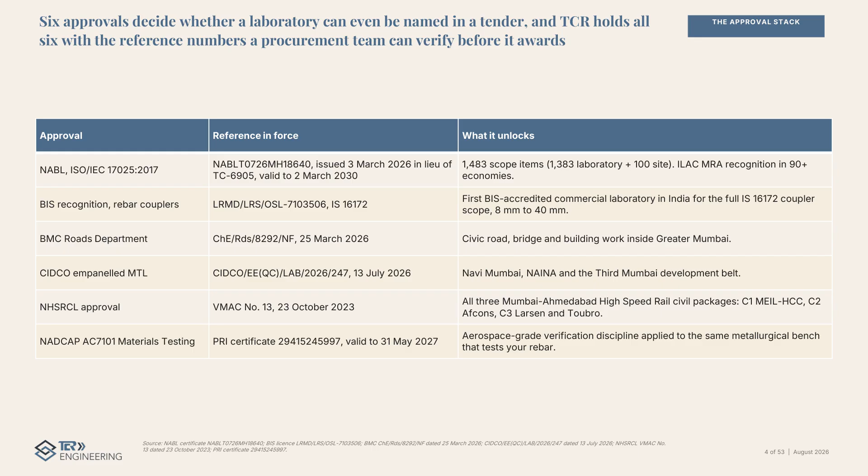Accreditation is not a logo on a letterhead. It is a traceable measurement chain with a stated uncertainty, and that is precisely what survives an arbitration, an audit, or a municipal challenge. Four things sit behind every accredited number.

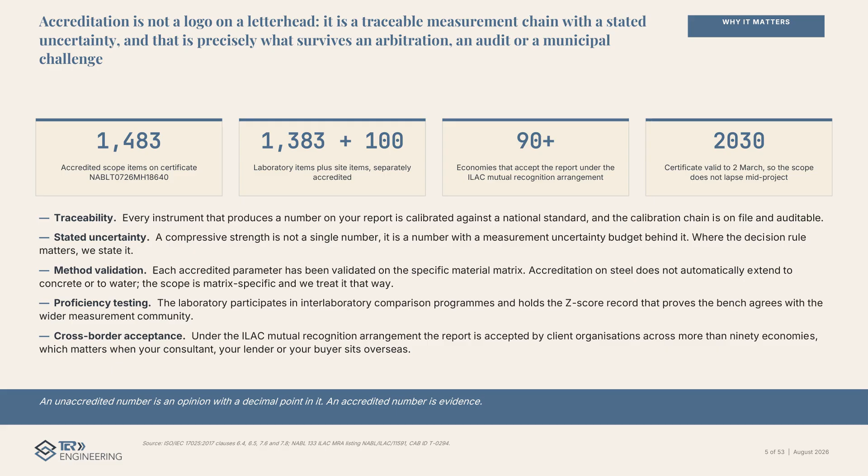The instrument is calibrated against a national standard and the chain is on file. The result carries a measurement uncertainty budget. The method has been validated on your specific material, because accreditation on steel does not automatically extend to concrete or to water, and the laboratory proves itself in interlaboratory comparisons. Strip any of those away, and what remains is an opinion with a decimal point in it.

This is the slide most laboratories will not show you. We publish the boundary of our own accreditation. On the left is what carries the NABL mark today: cement, binders, admixtures, aggregates, concrete including the durability suite, blocks, bricks, paver blocks, ceramic tiles, stone, rebar couplers, soil chemistry, and the site non-destructive tests on reinforced concrete. On the right...

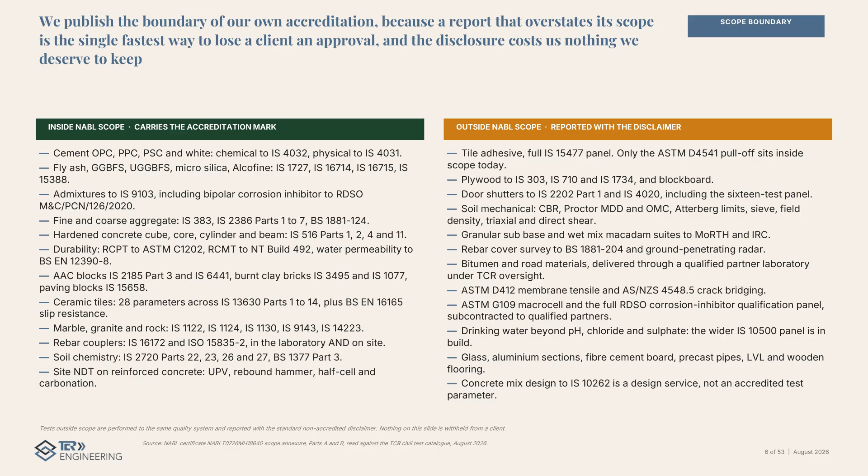...is what we perform to the same quality system but report with the standard non-accredited disclaimer: tile adhesive beyond the pull-off, plywood, door shutters, soil mechanical testing, cover survey, bitumen. We publish this because a report that overstates its scope is the fastest way to lose a client an approval.

Testing fails on logistics far more often than it fails on chemistry. So the operational answers come first: what to send, how much of it, how fast it comes back, and who collects it.

3 concrete cubes give you a strength result the next working day. 30 kilograms of soil covers a CBR. 24 blocks covers a full AAC analysis. 1 liter of water covers the construction water panel under IS 456.

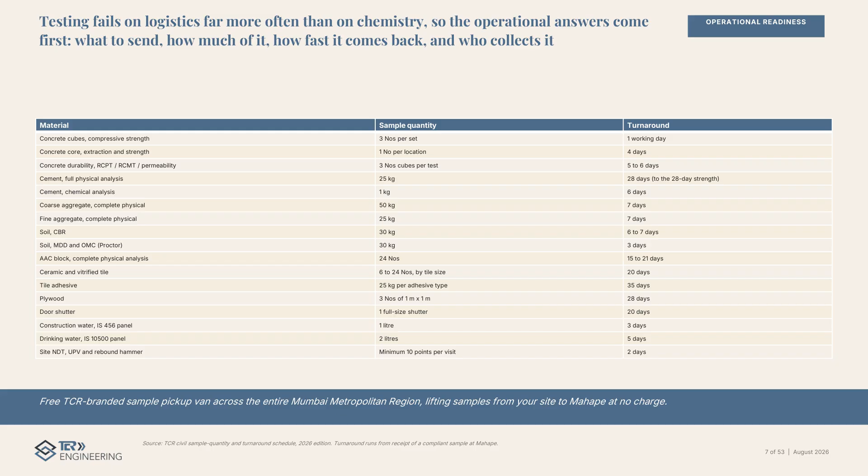And the piece that removes the argument entirely: TCR runs a free TCR branded sample pickup van across the entire Mumbai metropolitan region, lifting samples from your site to our Mahape laboratory at no charge.

Long-term rate contracts are not won on price. They are won by a laboratory that holds the client's program dates as if they were its own. So we derive the test calendar from the construction calendar. Cube ages, coupler lot releases, and pour temperatures are booked against your bar chart before the month starts.

Our site teams attend the pour, the pile, and the lot release rather than waiting for a sample to arrive. And where a method sits outside our accredited scope, we still carry the consolidated report and one signature. That is why Godrej, Kalpataru, Shapoorji Pallonji, and Rustomji renew rather than requote.

Segment 1, real estate developers. The defining feature of this segment is that a tower is judged twice. It is judged at handover on the finish, on whether the tiles are flat, the shutters are square, and the adhesive holds. And it is judged 20 years later on the concrete, on whether the cover was right and the chloride stayed out.

Most laboratories serve one of those two moments. TCR tests new construction materials and building finishing works on the same bench, under the same accreditation, with one report and one point of accountability.

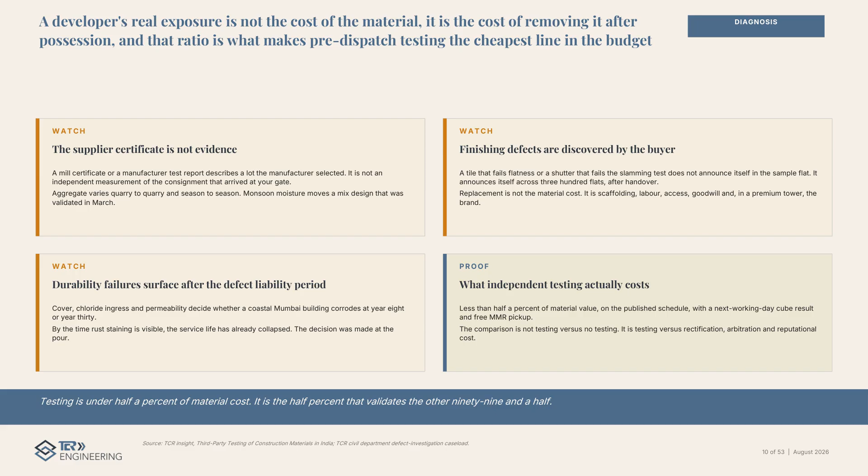Second, finishing defects are discovered by the buyer across 300 flats after handover. Third, durability failures surface after the defect liability period, when the decision that caused them was actually made at the pour. Independent testing costs under 0.5% of material value. It is the 0.5% that validates the other 99.5%.

Every cementitious binder that goes into the mix is tested chemically and physically before it is approved for the pour. And every parameter on this list sits inside the accredited scope. Cement runs a full chemical panel under IS 4032 and a full physical panel under IS 4031 out to the 28-day strength. Slag, microsilica, fly ash and Alcofine each carry their own chemistry and their own activity or reactivity index.

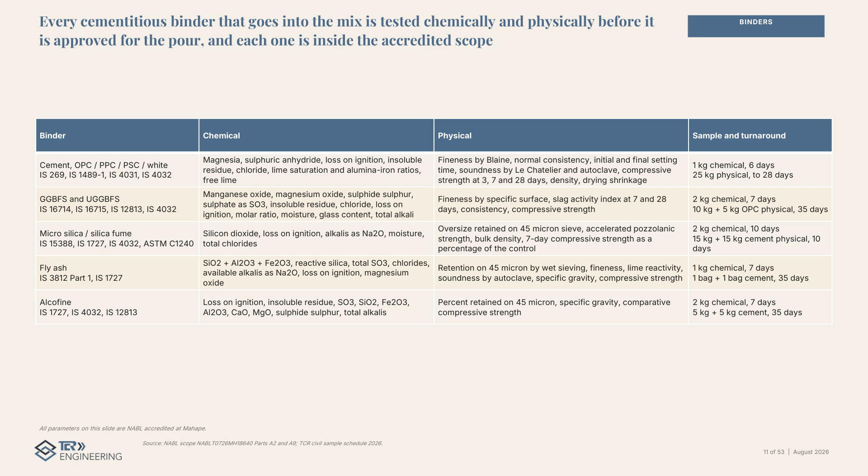The point is not the individual test. It is that a mix design is only as good as the weakest binder in it. And you cannot know which one that is without measuring all of them.

Admixture and water are the two mix inputs most often accepted on trust. And they are the two that most reliably explain a strength result nobody can otherwise account for. On the admixture side, one liter and five days gives you the chemical panel under IS 9103: dry material content, relative density, chloride ion content, pH and ash.

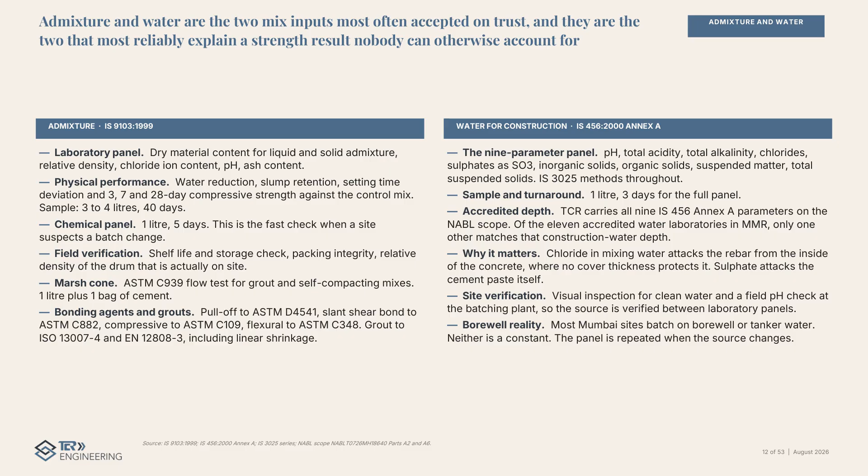On the water side, one liter and three days gives you the full nine parameter panel that IS 456 Annex A actually requires. TCR carries all nine on the accredited scope. Chloride in mixing water attacks the rebar from inside the concrete, where no cover thickness protects it.

Aggregate is 60 to 75% of the concrete by volume, and the most variable input on the site, which is why the aggregate panel is the one we ask developers to run most often. On the physical side: grading, specific gravity, water absorption, bulk density, impact, crushing, 10% fines, Los Angeles abrasion, flakiness and elongation. On the chemical side: soundness in sodium and magnesium sulfate, alkali aggregate reactivity, chloride, sulfate, and organic impurities.

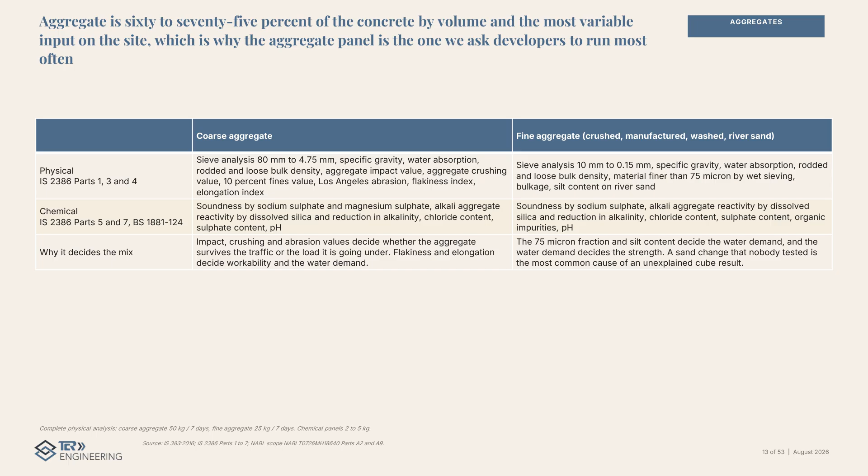The one that catches most sites is the 75 micron fraction in the sand. It drives the water demand, and the water demand drives the strength. A sand change nobody tested is the most common cause of an unexplained cube result.

Reinforcement is where a saving on paper becomes a liability in concrete. Mechanically, we run tensile strength, 0.2% proof stress, elongation, reduction in area, and the bend and rebend test, which is the check that finds embrittlement a tensile test alone will pass.

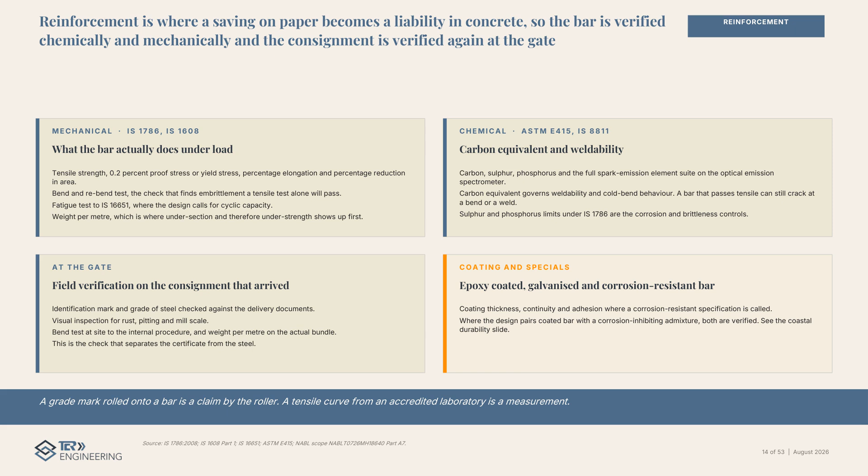Chemically, we run carbon, sulfur, phosphorus, and the full element suite on the spark emission spectrometer, because carbon equivalent governs weldability and cold bend behavior. And at the gate, we verify the identification mark, the visual condition, and the weight per meter of the bundle that actually arrived. That last one is what separates the certificate from the steel.

Concrete is tested three times over, and all three have to reconcile. Before the pour, we design or revalidate the mix under IS 10262, and revalidation matters most when a binder, a sand, or an admixture source changes.

During the pour, we measure workability, plastic density, and, critically, concrete temperature to ASTM-C 1064, which sits on our accredited site scope. After the pour, we measure compressive strength on cubes, on extracted cores, flexural strength on beams, density, and where there is a dispute, cement content, and chloride content on the hardened concrete itself.

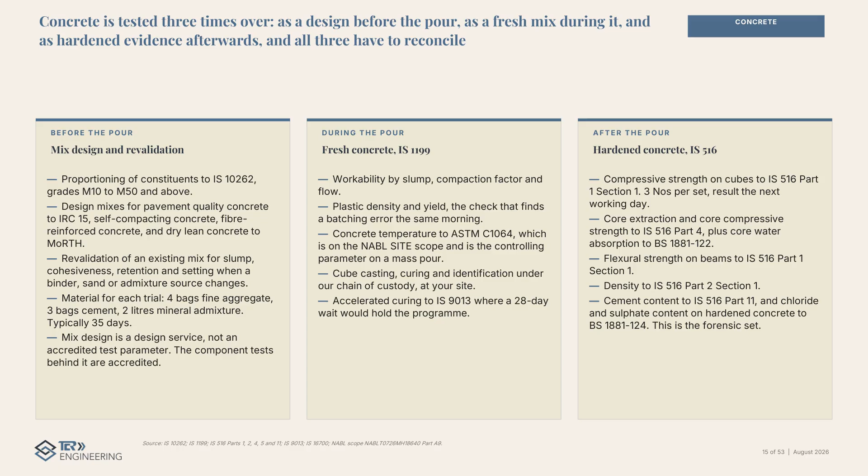That last set is the forensic one. Strength tells you whether the building stands up today.

Durability tells you how long it keeps standing. And in coastal Mumbai, that is the more expensive question to get wrong.

The rapid chloride penetration test under ASTM C 1202 is the most specified durability test in this city, and it is on our accredited scope. So is the rapid chloride migration test under NT-Build 492, which gives you a coefficient you can put into a service life model rather than a comparative index. So is water permeability, which is usually the acceptance criterion on a raft or a water tank.

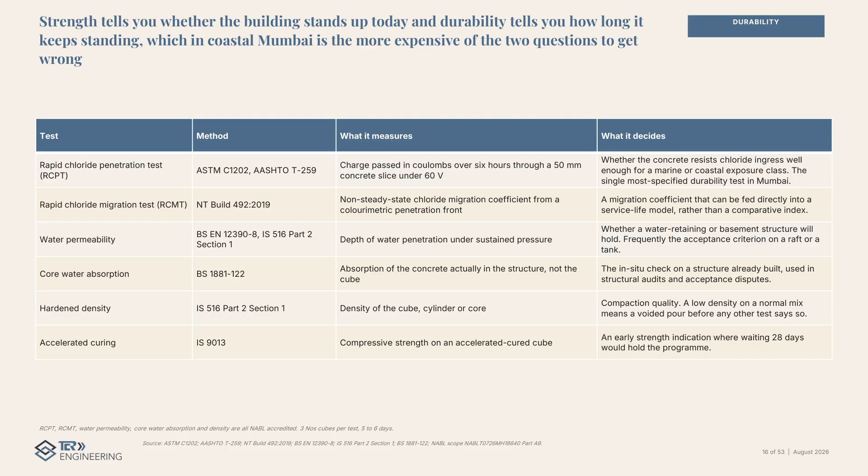3 cubes per test, 5 to 6 days.

Tile testing is the fastest growing line on our civil bench. And the reason is simple. A tile is the one material a flat buyer inspects personally, from standing height on handover day.

TCR carries 28 accredited ceramic tile parameters under IS 13630. 9 of them are geometry: length, width, thickness, rectangularity, straightness, and 4 separate flatness measurements. The rest covers strength, abrasion, water absorption, thermal shock, crazing, frost, and the coefficient of friction, wet and dry, which is the slip test that reaches a court.

Sample: 6 to 24 tiles, depending on size, 20 days.

A tile that passes every test still fails if the adhesive lets go. And adhesive is where Indian sites most often substitute a grade without telling anybody.

The full panel under IS 15477 covers tensile and shear adhesion, dry, wet, and after heat aging, plus open time, adjustment time, slip, and deformability.

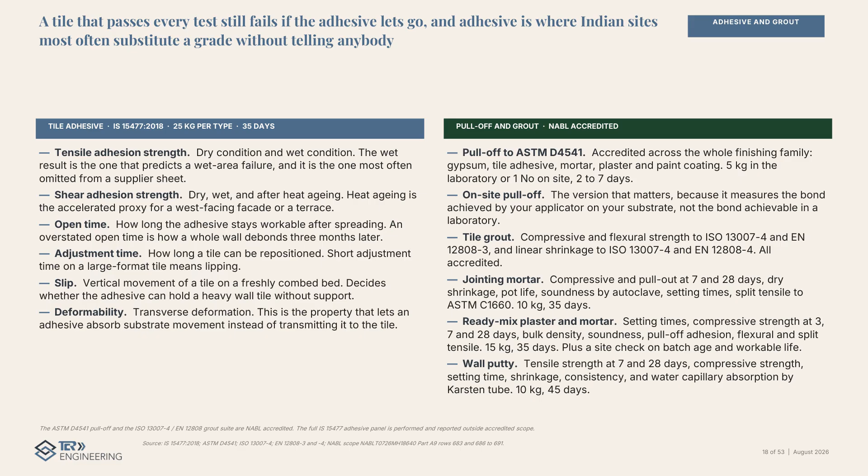What is accredited is the pull-off test under ASTM D 4541, including on-site, and the full grout suite. The on-site pull-off is the one that matters because it measures the bond your applicator achieved.

Blocks and bricks are bought by the truckload on price and installed before anybody measures them. So the whole masonry package is verified on arrival rather than after the plaster cracks.

AAC blocks are accredited. 24 blocks gives you dimensions, compressive strength, density, drying shrinkage, moisture content, and thermal conductivity in 15 to 21 days. Burnt clay bricks and paving blocks are also accredited.

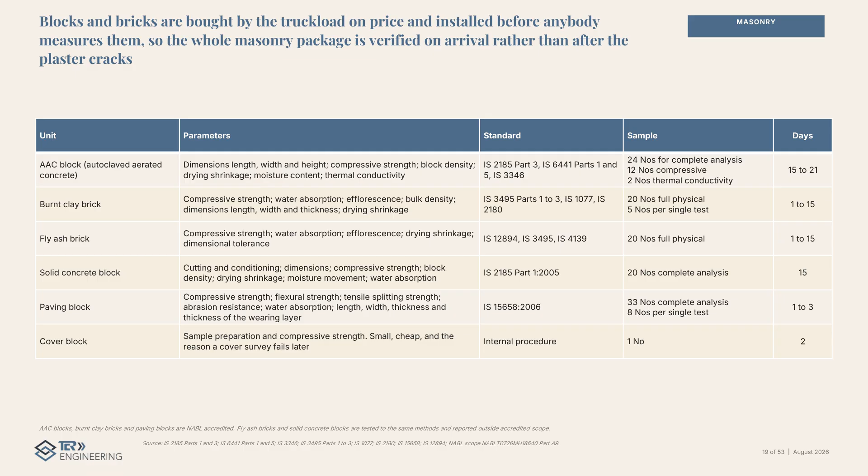Note the cover block at the bottom of that list. It is the cheapest item on the page. 1 block and 2 days. And it is the reason a rebar cover survey fails 6 months later.

Plywood and door shutters are the two finishing items that fail loudest after possession. And both are now high volume lines on the TCR bench.

Plywood: 3 panels of 1 meter by 1 meter, 28 days, covering dimensions, moisture, density, glue shear strength dry, and after 72 hours in water, tensile, static bending, and nail and screw holding power. That water resistance set is the BWP versus MR distinction, measured rather than claimed.

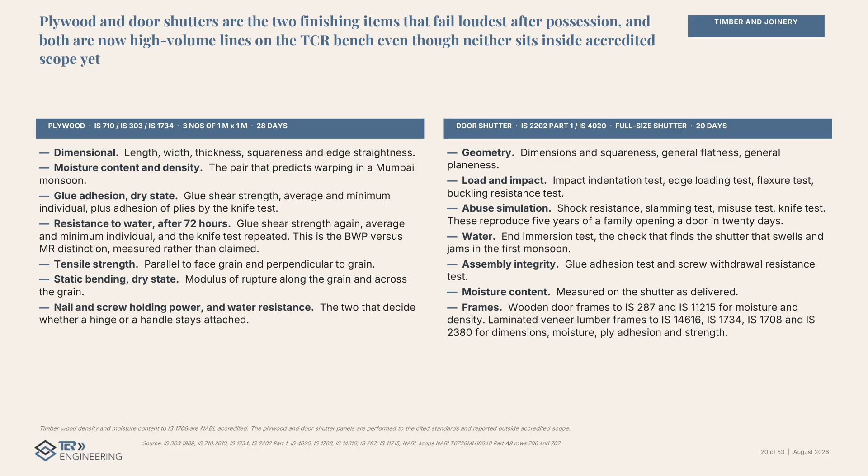Door shutters: 1 full-size shutter, 20 days, 16 tests, including slamming, misuse, end immersion, and screw withdrawal. Both sit outside our accredited scope today, and we mark them accordingly.

Stone, boards, and plaster complete the finishing package. The stone family is fully accredited, which matters because a marble floor is both the most visible and the most disputed surface in a tower.

7 pieces of 300 by 300 millimeter marble, 8 days, gives you water absorption, specific gravity, hardness, and dimensions. Granite and rock the same. Gypsum plaster, building lime and timber are also accredited.

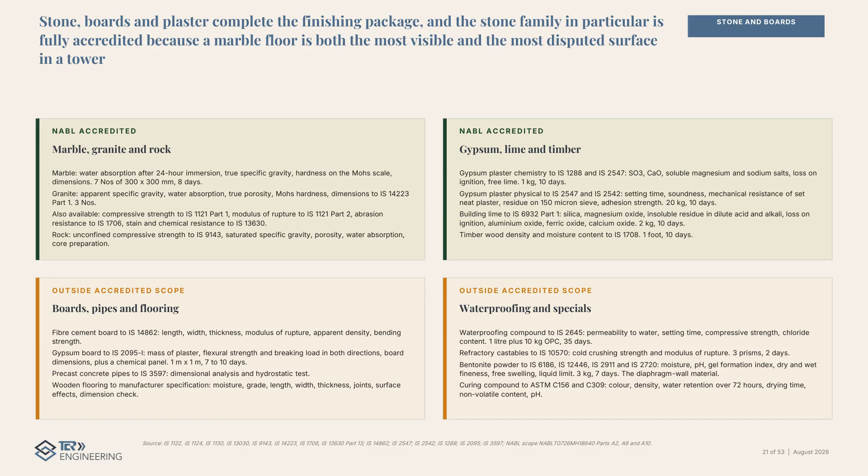Fiber cement board, gypsum board, precast pipes, wooden flooring, waterproofing compound, refractory castables, and bentonite are tested to the cited standards and reported outside accredited scope.

The facade package is where a developer's specification is quietly value engineered. So aluminium sections and glass are verified for alloy, coating, and safety performance rather than for appearance.

On aluminium, we run the full chemical composition by optical emission spectrometry, which is the check that finds a 6063 section sold as 6061. Then tensile, hardness, weight per meter, powder coating thickness, scratch hardness, and cross-cut adhesion.

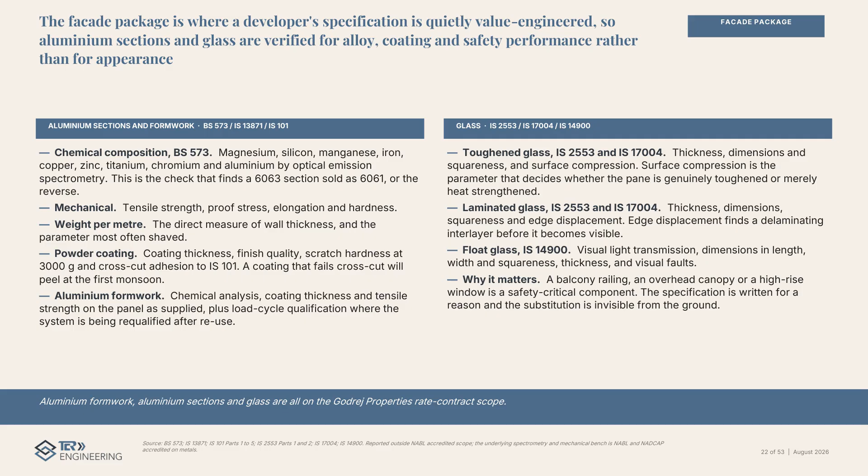On glass, we measure surface compression on toughened panes, which is what separates genuinely toughened glass from heat-strengthened glass, and edge displacement on laminated panes.

A waterproofing membrane is specified on its tensile strength and it fails on its elongation. ASTM D 412 measures both maximum stress before rupture and how far the elastomer stretches first. A membrane at 400% elongation accommodates 5 times its original length.

One at 100% reaches only double.

D 412 pulls a clean strip under ideal conditions, but buildings do not crack under ideal conditions. So we pair it with the crack bridging test under AS-NZS 4548.5, where the membrane is bonded to a cracked substrate and the crack is opened while the membrane is watched.

Coastal Mumbai concrete is a chloride problem. A bipolar corrosion inhibiting admixture acts on both halves of the corrosion cell at once. It forms a protective layer on the steel and slows chloride penetration through the concrete. Older anodic-only inhibitors leave the cathodic half running once chloride arrives.

Chloride breaches the passive film on steel at about 0.4% by mass of cement, and past that point, the rust expands, cracks the cover, and accelerates itself. Indian Railways specifies this category under RDSO specification 126 of 2020.

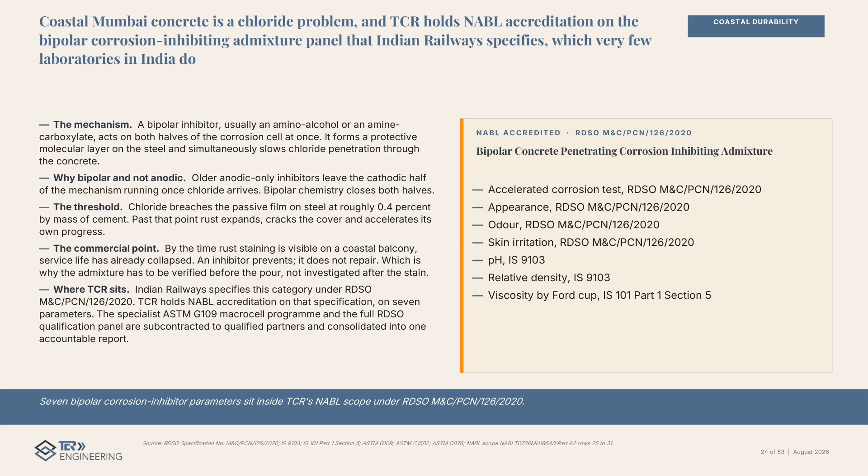TCR holds NABL accreditation on 7 parameters of that specification. 4 of India's largest developers hold long-term rate contracts with TCR rather than issuing job orders. The Godrej Properties contract, awarded April 2026, runs 3 years across the whole Mumbai zone and more than 8 locations. Its scope is a fair description of what a full developer engagement looks like.

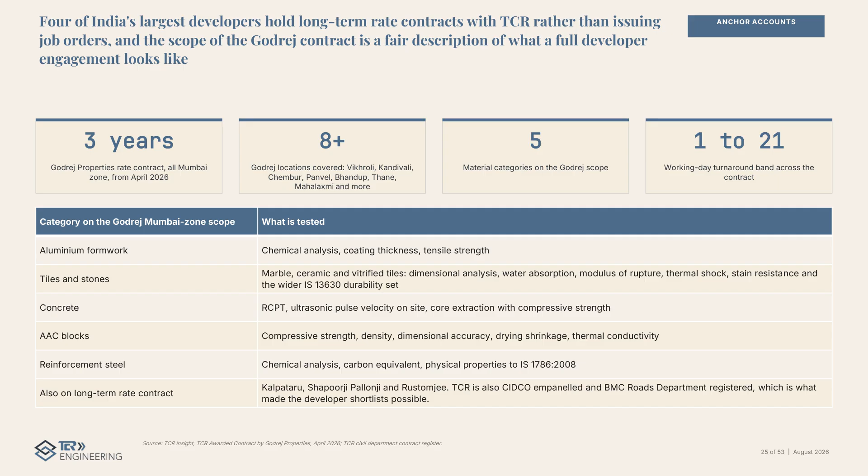Aluminium formwork, tiles and stones, concrete including RCPT and site ultrasonic pulse velocity, AAC blocks, and reinforcement steel with carbon equivalent. Kalpataru, Shapoorji Pallonji, and Rustomjee run on the same basis. What made those shortlists possible was CIDCO empanelment and BMC registration.

This is the page to send to a procurement or quality engineer. 20 materials, what to collect, how much of it, and when the result lands. 3 cubes gives you strength in 1 day. 25 kilograms of cement gives you the full physical panel, though that one runs 28 days because it goes to the 28-day strength.

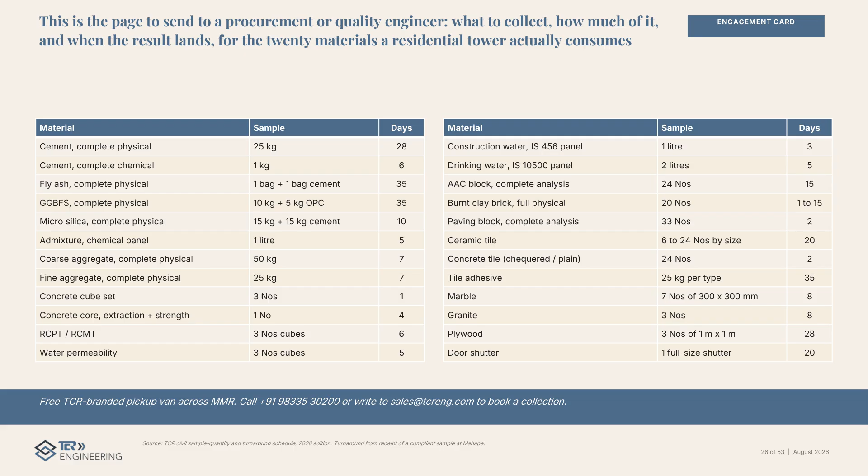24 AAC blocks, 15 days. 6 to 24 tiles, depending on size, 20 days. 25 kilograms of tile adhesive per type, 35 days. 1 liter of construction water, 3 days. And the pickup van collects all of it from your site at no charge, anywhere in the Mumbai metropolitan region.

Segment 2: Infrastructure and EPC contractors. This segment has one structural feature that developers do not. The laboratory has to be on the approved list before the testing package is committed, and often before the contract is even awarded. That is why the approvals matter more here than the price list does.

TCR is the first BIS-accredited commercial laboratory in India for Rebar Couplers, approved on all 3 high-speed rail civil packages, registered with the BMC Roads Department, and empaneled with CIDCO for the 3rd Mumbai belt.

Maharashtra has committed a new project pipeline from 2026 onward that will consume construction materials testing for a decade, and the laboratory decision on each package is being made now.

6 projects sit in the top priority band. 3rd Mumbai and the KSC New Town, 323 square kilometers in the Raigad corridor. NAINA, the Navi Mumbai Airport Influence Ecosystem. The Thane Ring Metro, 29 kilometers and 22 stations. Mumbai Metro Line 5A and the Vadhavan Port to Samruddhi Freight Corridor.

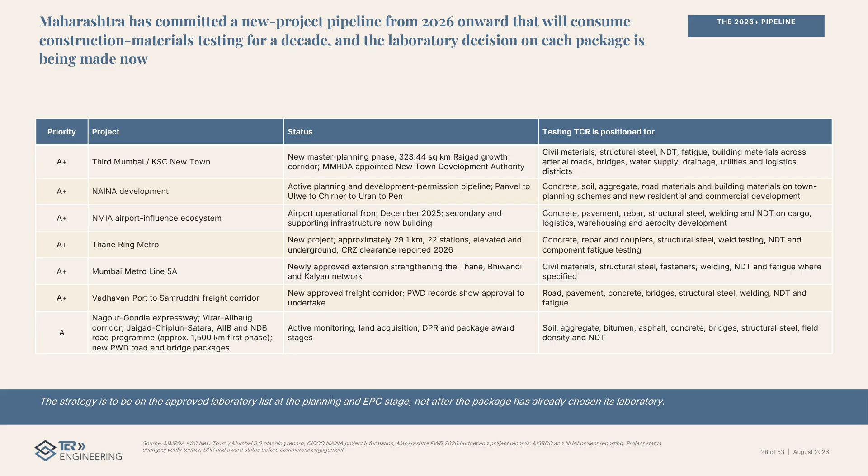TCR's strategy is to be on the approved laboratory list at the planning and EPC stage, not afterwards. This is the capability I would ask you to remember.

TCR is the first and only commercial laboratory in India accredited by BIS for the full IS 16172 Rebar Coupler scope, 8mm to 40, and on a viaduct program that is not a credential, it is a critical-path dependency. Here is why: in congested reinforcement, a lap splice needs length, cover, and space a metro pier cap does not have, so a mechanical splice replaces it. Once the coupler carries the load path, the coupler is the reinforcement.

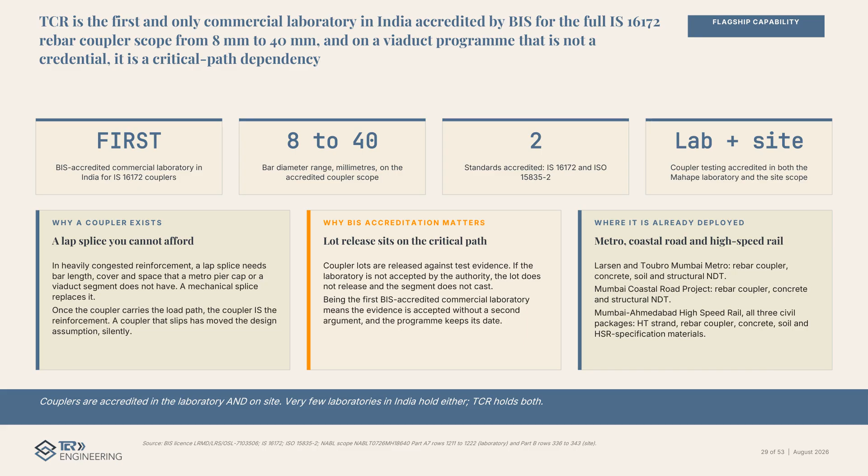Lots are released against test evidence. If the laboratory is not accepted, the lot does not release, and the segment does not cast. The coupler qualification set is 5 mechanical tests plus the chemistry, and each one exists because a different real failure mode was found in service.

The static tensile test proves the splice is stronger than the bar, so failure occurs in the bar. The slip test measures residual movement across the splice, because a coupler that is strong but not stiff turns slip into crack width, and crack width into chloride ingress.

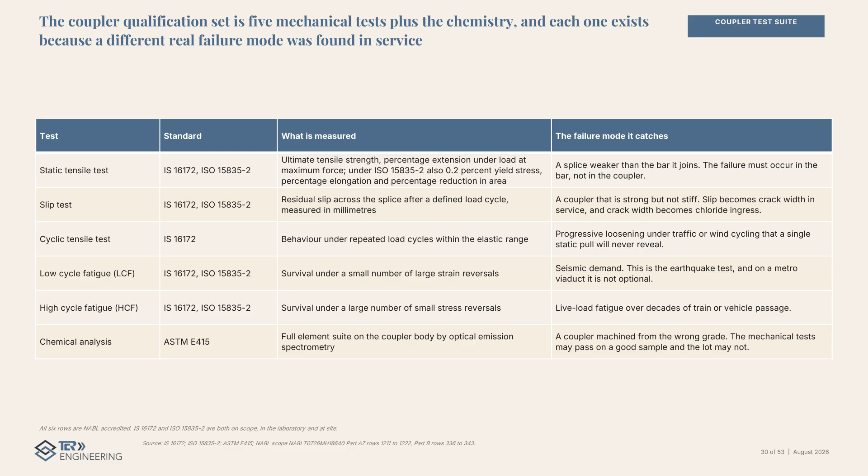The cyclic test finds progressive loosening. Low cycle fatigue is the seismic test. High cycle fatigue is the live load test over decades. And the chemistry catches a coupler machined from the wrong grade, which the mechanical tests on a good sample will not. Pre-stressing steel and reinforcement carry the load in every viaduct and every long span deck.

High tensile strand is tested for breaking load, 0.2% proof load, elongation and relaxation under IS 14268 and ASTM A416. We deliver that on all 3 high-speed rail civil packages. Strand governs camber, pre-stress loss, and therefore the long-term geometry of a segmental viaduct.

On reinforcement, we run the full IS 1786 set plus fatigue and carbon equivalent. And because the metallurgical bench, the concrete bench, and the site NDT bench sit under one management system, an anomaly in one gets chased into the others.

Geotechnical and pavement layer testing is a large part of every highway and township package. The foundation soil suite covers modified Proctor, CBR, Atterberg limits, sieve analysis, specific gravity, unconfined compression, free swell, and field density. Granular sub-base and wet mix macadam carry their own gradation, impact, and design mix sets under MoRTH. 30 kilograms covers a CBR or a Proctor.

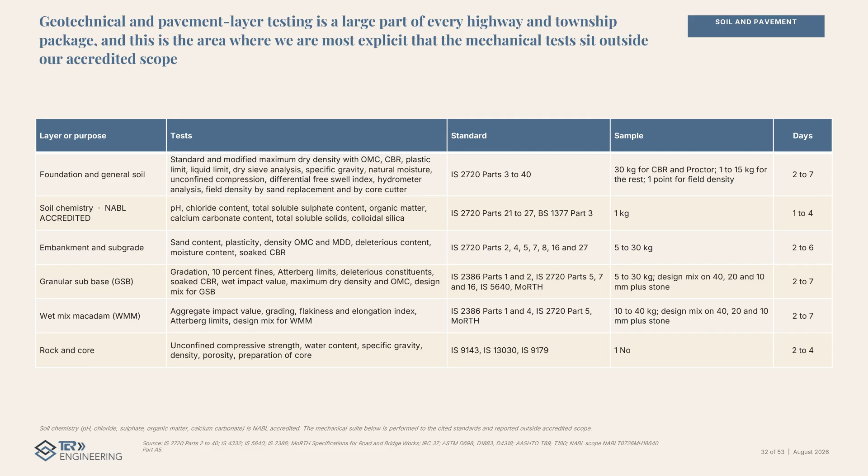Now the honest part: only the soil chemistry sits inside our NABL scope - pH, chloride, sulfate, organic matter, and calcium carbonate. The mechanical suite is performed to the same standards and reported outside accredited scope, and we mark it that way.

Road and pavement work reaches TCR through the BMC Roads Department registration secured in March 2026. Reference CHE/RDS/8292. NABL accreditation was the prerequisite for it. The registration covers chemical, mechanical, and non-destructive testing inside Greater Mumbai.

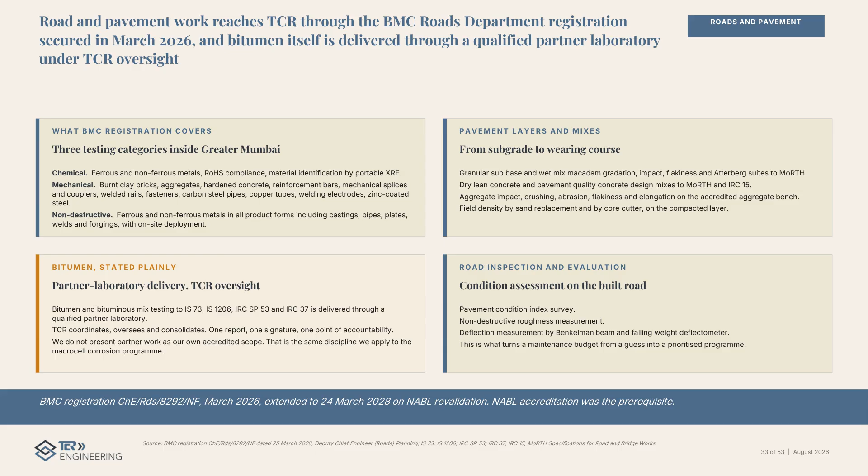On pavement layers, we run granular sub-base, wet mix macadam, dry lean concrete, and pavement quality concrete design. On the built road, we run pavement condition index, roughness, and deflection by Benkelman beam, or falling weight deflectometer. Bitumen itself is delivered through a qualified partner laboratory under our oversight, and we say so rather than presenting it as our own scope.

500 bridges is not a marketing number, it is an operating capability. TCR runs a continuous program with Maharashtra PWD, and from March 2026, a robotic underwater inspection program with the BMC covering more than 400 bridges with AI assistance on the imagery. The reason robotic and underwater access matters is that the majority of unexpected bridge failures originate at the pier, the pile cap, and the scour protection, which is precisely what a walkover survey never sees.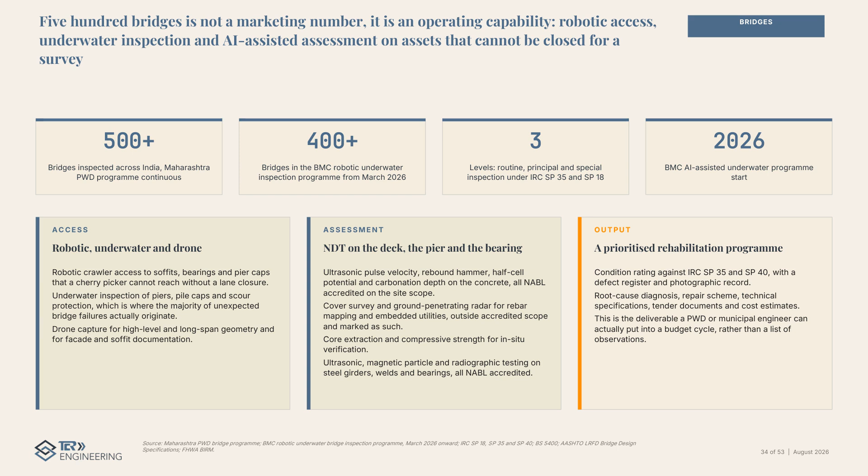The output is not a list of observations. It is a condition rating, a repair scheme, specifications, tender documents, and a cost estimate.

Structural steel, welding, and fatigue sit on the same accredited metallurgical bench that serves aerospace. On mechanical properties, we run tensile, proof stress, elongation, Charpy and Izod impact, including sub-zero, hardness in 3 scales, and component fatigue. On welding, we run bend tests to ASME Section 9, AWS D1.1, and API 1104, plus macro and micro examination of the weld and heat affected zone.

On non-destructive testing, we run ultrasonic, radiographic, magnetic particle, and liquid penetrant, accredited in the laboratory and on-site. That bench also holds NADCAP AC 7101, which is the strictest audit any of it faces.

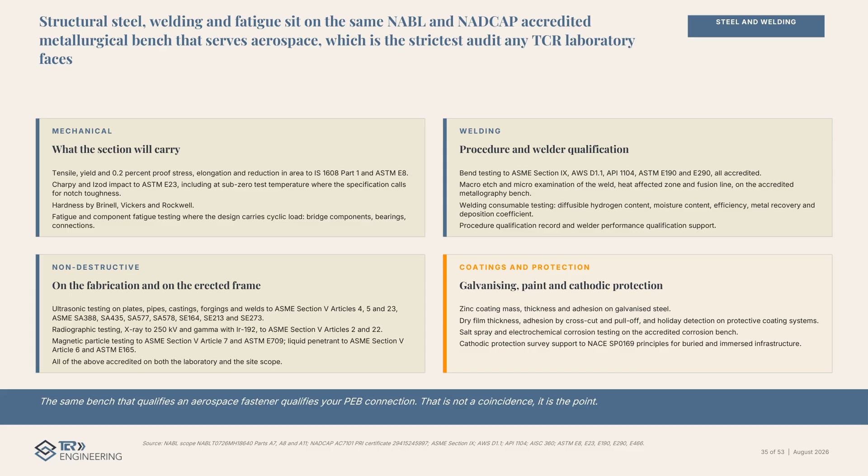Industrial civil infrastructure is a distinct market from buildings and roads. TCR certifies grain silos to 10,000 metric ton capacity against EN 10346 S350GD coated steel sheet. And where the silo carries an explosive dust scope, the assessment runs inside the ATEX and PESO certification framework, because grain dust is an explosion hazard with its own regulatory register.

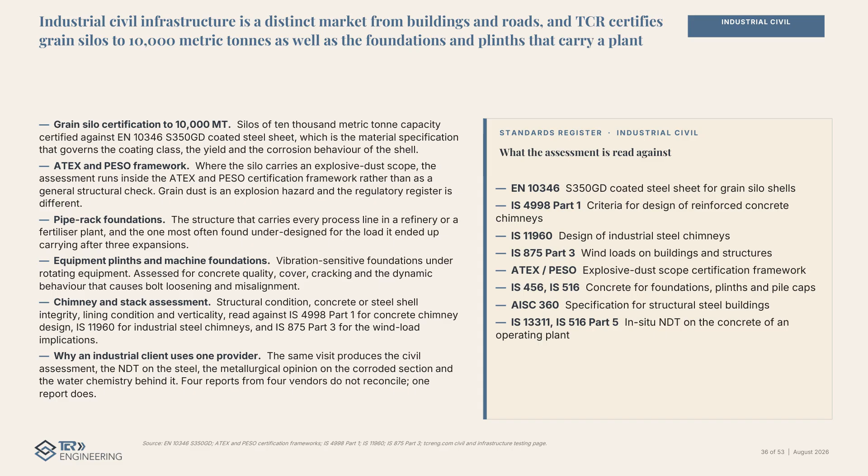The same capability extends to pipe rack foundations, equipment plinths, machine foundations and chimneys, read against IS 4998, IS 11960, and IS 875 Part 3 for wind. A chimney, a stack, or a tall building core that is out of plumb is carrying a wind moment nobody designed for.

Theodolite survey is the measurement that turns a suspicion into a number. We measure deviation from vertical at successive elevations, straightness between them, which distinguishes a uniform lean from a local bulge and twist. Here is why it matters.

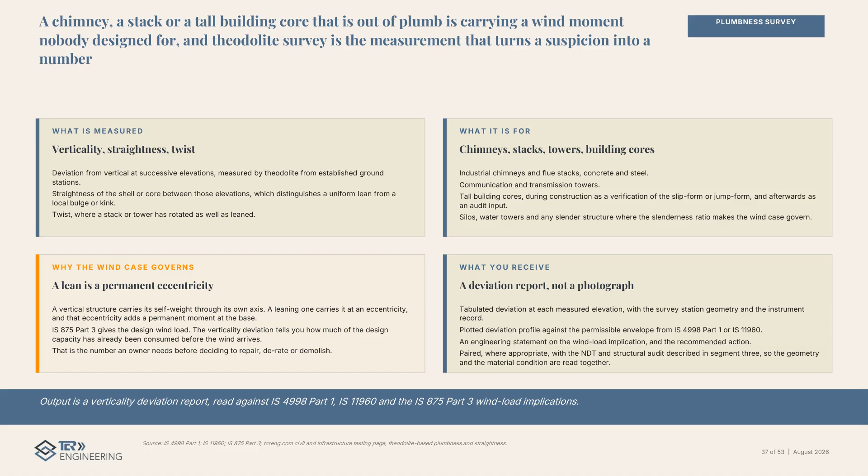A vertical structure carries its self-weight through its own axis. A leaning one carries it at an eccentricity, and that adds a permanent base moment. The deviation report tells the owner how much design capacity has already been consumed before the wind arrives.

The infrastructure track record is the part of this brief a procurement team can verify independently, which is why it carries more weight than any capability claim. TCR is approved on the Mumbai-Ahmedabad high-speed rail under VMAC number 13, dated October 2023, and engaged across all 3 civil packages since March 2024.

MEIL-HCC, AFCONS, and Larsen & Toubro. 500 bridges with Maharashtra PWD. 400 bridges in the BMC Robotic Underwater Program. The Statue of Unity through construction. Mumbai Metro, the Coastal Road.

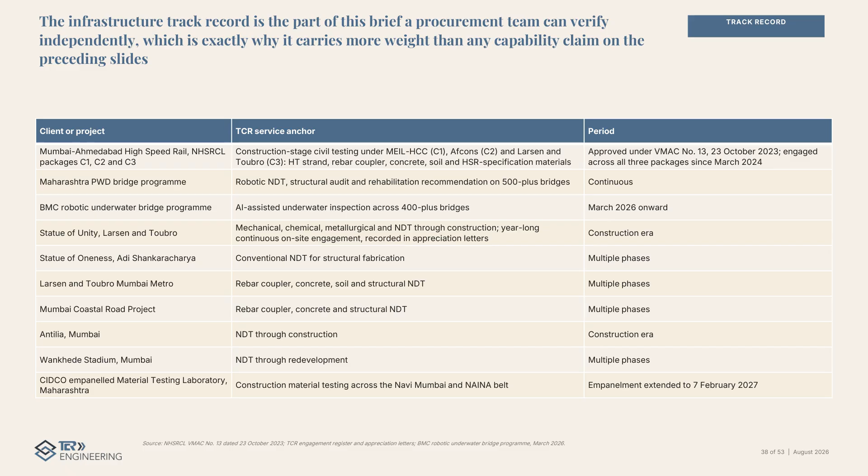Antilia, Wankhede Stadium. On an infrastructure package, the laboratory decision is made earlier than most contractors expect. So the useful question is who to bring TCR to and at what stage.

10 roles matter, starting with the authority that maintains the approved laboratory list and the DPR consultant who actually writes the testing specification. If that specification names a scope no accredited laboratory in the region holds, the program discovers it 2 years later. Then vendor registration, which has a lead time, then mobilization, first lot release,

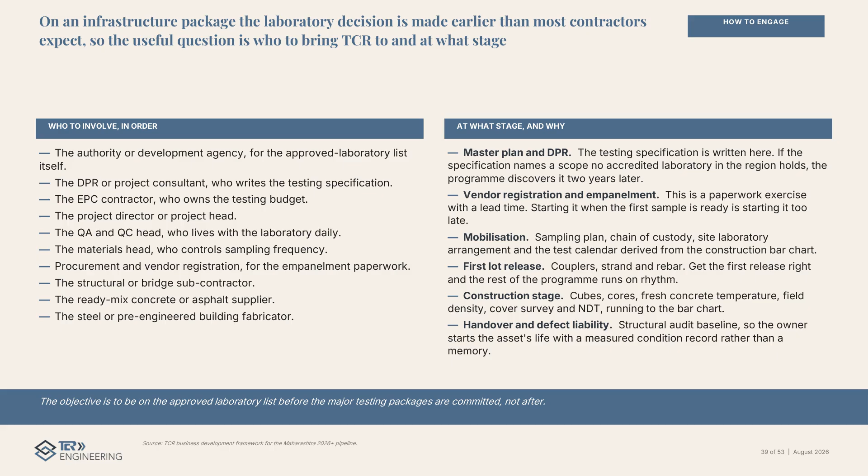construction stage, and finally the handover audit baseline, so the owner starts the asset's life with a measured condition record.

Segment 3: Structural audit. This is a statutory practice, not a discretionary one. More than a dozen audits completed across India, and in Mumbai alone, more than 30,000 buildings sit inside the statutory audit mandate. The work is not a walkover and a letter.

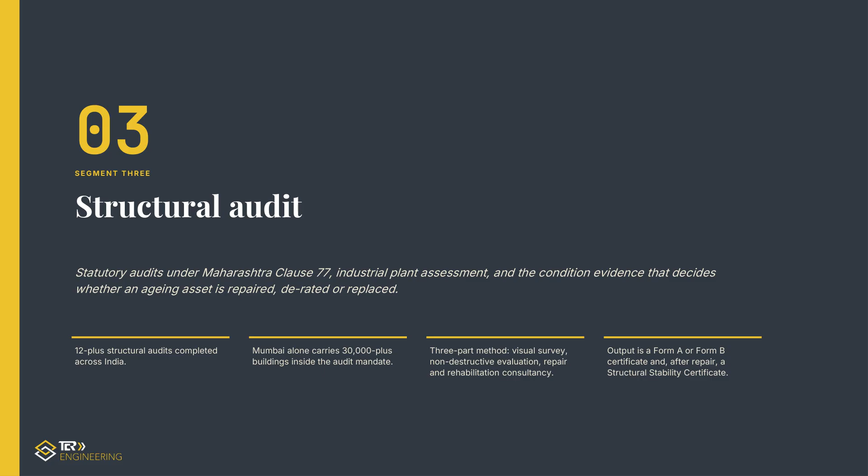It is a 3-part method: a member-by-member visual survey, a non-destructive evaluation at the locations the survey identifies, and a repair and rehabilitation consultancy that ends in a structural stability certificate once the work is done. The same method applies to a housing society and to a refinery.

Clause 77 of the Maharashtra Municipal Corporations Act puts a statutory clock on every building past 15 years, and the obligation sits with the society or the owner, not with the municipality.

An audit is recommended from 15 years and mandatory past 30. The cycle is 5 years between 15 and 30 and 3 years after 30. What the audit has to establish is present condition, expected residual life, areas needing immediate repair, and a corrective program.

Here is the commercial point. Between 15 and 30 years, repair is a maintenance decision. Past 30, with corrosion already through the cover, it is a rehabilitation project at several times the cost.

The audit runs in 3 parts, and the sequence is the discipline. Part A is a member-by-member visual survey, inside and outside, with photographic documentation and a review of whatever drawings still exist. Its output is the list of locations Part B will test, because testing everywhere is not an audit, it is a budget.

Part B is the non-destructive evaluation at those locations: pulse velocity, rebound hammer, half cell potential, carbonation depth, cover survey, and core extraction.

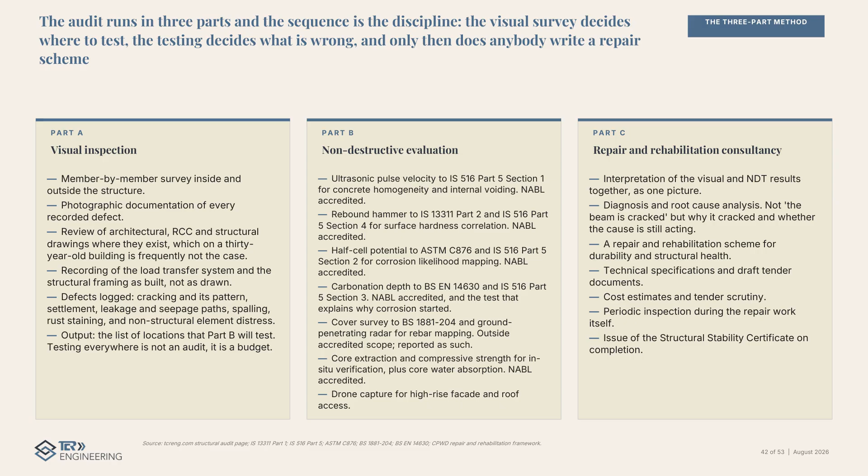Part C interprets both together, diagnoses the root cause, writes the repair scheme, the specifications, the tender documents and the cost estimate, and issues the stability certificate after the work.

6 site tests carry almost every structural audit conclusion, and 4 of the 6 sit on our NABL site scope. Ultrasonic pulse velocity for homogeneity and voiding. Rebound hammer for surface hardness, always read with pulse velocity and never alone. Half cell potential for a corrosion probability map across a grid rather than a spot reading.

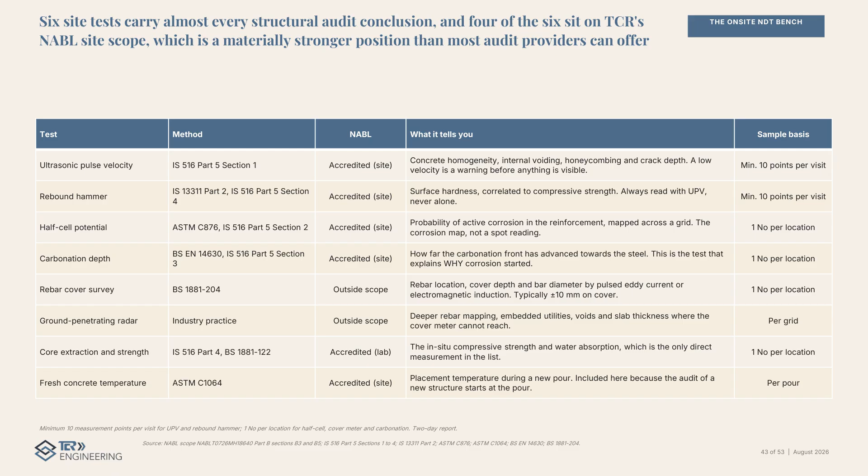And carbonation depth, which is the test that explains why the corrosion started in the first place. All 4 accredited. The cover survey and ground penetrating radar sit outside accredited scope, and we mark them. Core extraction is accredited in the laboratory and is the only direct measurement in the list.

Rebar cover survey has become one of the fastest growing services on the bench, because clear cover is the single design parameter most often lost between the drawing and the pour.

The scanner uses pulsed eddy current or electromagnetic induction to return rebar location, cover depth, and bar diameter together, typically within 10 millimeters on cover.

We scan on a grid, not on spots, and report in 2 and 3 dimensions, so the cover map overlays the reinforcement drawing. Most of coastal Mumbai is severe or very severe exposure, needing 45 to 50 millimeters.

A slab poured at 22 has not lost half its cover. It has lost most of its service life.

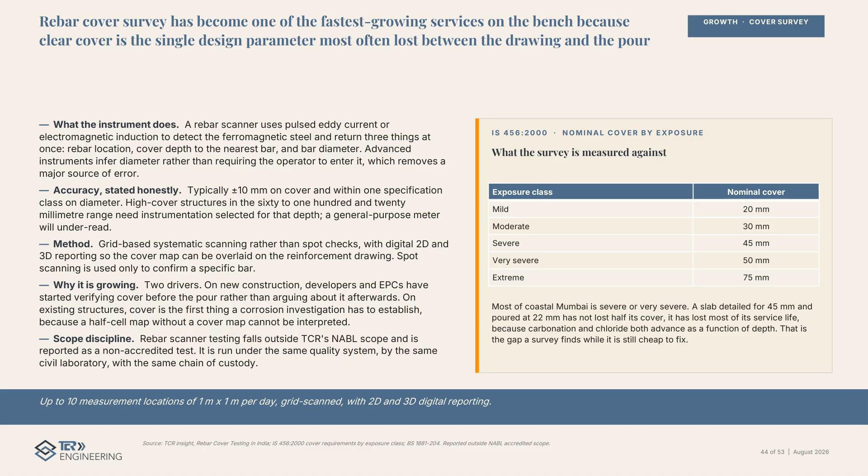Fresh concrete temperature monitoring is the other fast-growing on-site line, and unlike the cover survey, it sits squarely inside our accredited site scope under ASTM-C 1064.

Cement hydration is exothermic. In a raft, a pile cap, or a transfer girder, the core cannot shed heat as fast as the surface, so the core expands against a cooler restraint, then contracts against a hardened surface, and the element cracks from the inside out.

The controlling variable is the core to surface differential, not the peak alone. We measure placement temperature on the accredited method and track the profile through the hydration peak. An industrial or government structural audit answers a different question from a housing society audit.

Not whether the building is safe to occupy, but whether the asset can carry another operating cycle. In a plant, that means the workshop frame, the crane gantry, the pipe rack foundation, the machine plinth, and the chimney. In a public asset, it means a deliverable written to be usable inside a budget cycle: condition rating, prioritized defect register, repair scheme, specification, quantities and cost. And a cracked plinth under a rotating machine is a vibration problem before it is a concrete problem, which is why the audit has to name the cause and not just the symptom.

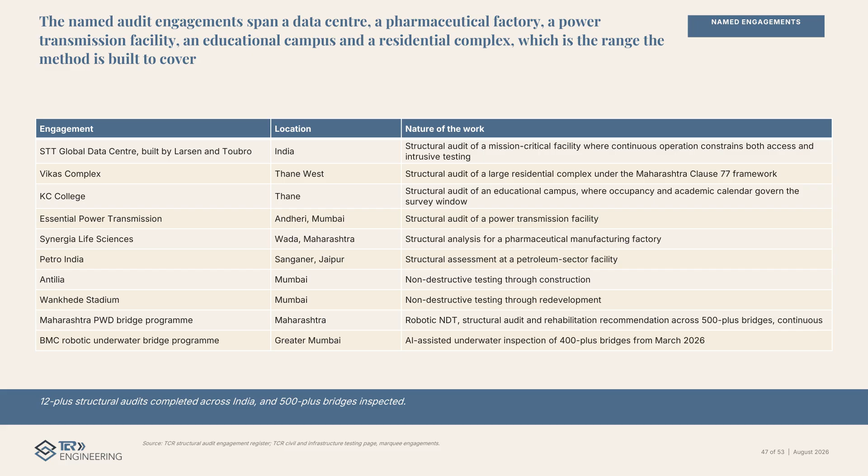The named audit engagements span a data center, a pharmaceutical factory, a power transmission facility, an educational campus, and a residential complex, which is the range the method is built to cover. The STT Global Data Center, built by Larsen and Toubro, where continuous operation constrains both access and intrusive testing. Vikas Complex in Thane West, KC College in Thane, Essential Power Transmission in Andheri, Synergia Life Sciences at Wada, Petro India at Sanganer, Jaipur, alongside the continuous Maharashtra PWD Bridge Program and the BMC Robotic Underwater Program. More than a dozen audits in total, and 500 bridges.

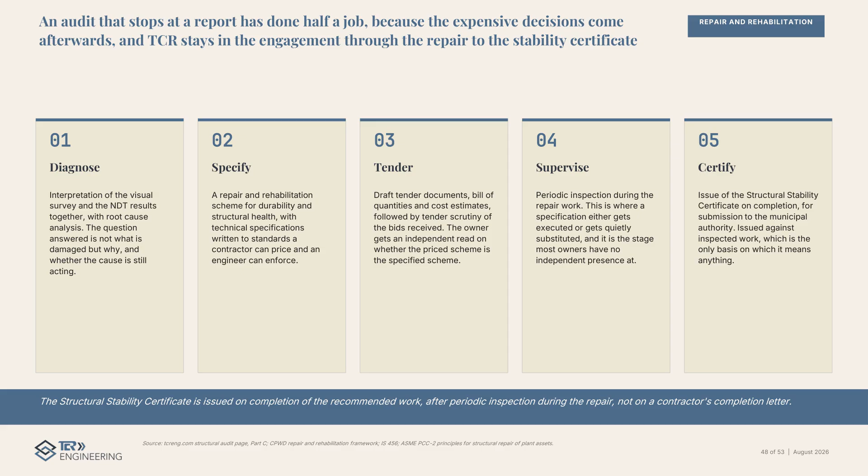An audit that stops at a report has done half a job, because the expensive decisions come afterwards. TCR stays in the engagement through 5 stages. Diagnose, where the visual survey and the NDT are interpreted together and the root cause is named, including whether the cause is still acting. Specify, writing a scheme a contractor can price and an engineer can enforce. Tender, including independent scrutiny of the bids received. Supervise, with periodic inspection during the repair, which is the stage most owners have no independent presence at. And certify, issuing the structural stability certificate against inspected work.

Water testing is the newest line on the bench, and I want to be precise about it. Construction water is deep and fully accredited, all 9 parameters that IS 456 Annex A requires, 1 litre, 3 days. Of the 11 accredited water laboratories in the Mumbai region, only one other matches that construction water depth. Drinking water is accredited today on pH, chloride, and sulfate. The wider IS 10500 panel is performed and reported outside accredited scope while the extension is built.

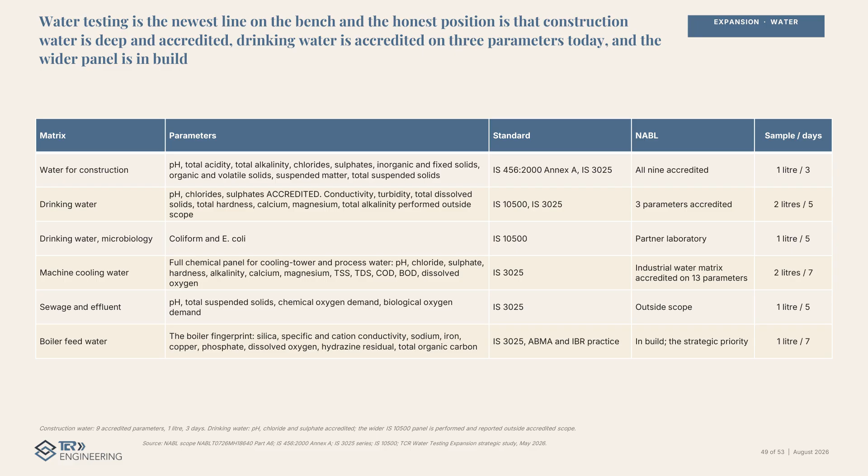Microbiology runs through a partner laboratory. Boiler feed water chemistry is the strategic priority and is in build.

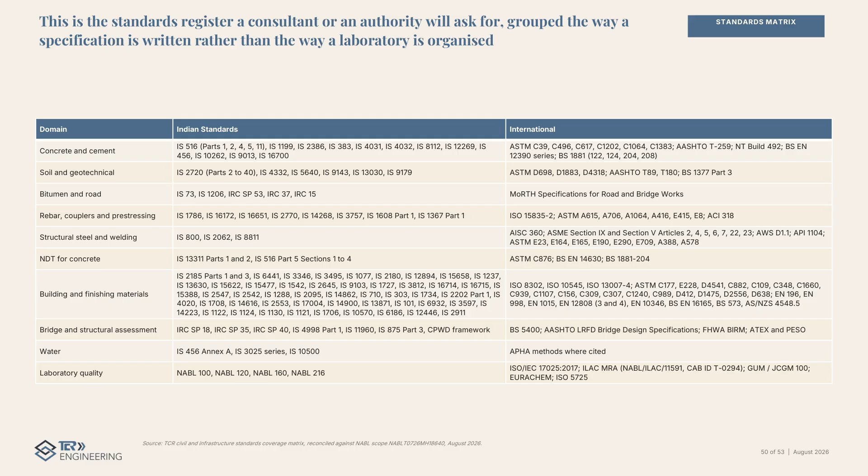This is the standards register a consultant or an authority will ask for, grouped the way a specification is written rather than the way a laboratory is organized. 10 domains: from concrete and cement through soil, bitumen, rebar and couplers, structural steel and welding, non-destructive testing on concrete, the full building and finishing materials register, bridge and structural assessment, water, and the laboratory quality standards themselves. I will not read this list aloud. Take it as the reference page, and note the last row: ISO 17025, the ILAC Mutual Recognition Arrangement, and the GUM and EURACHEM Uncertainty Framework behind every number.

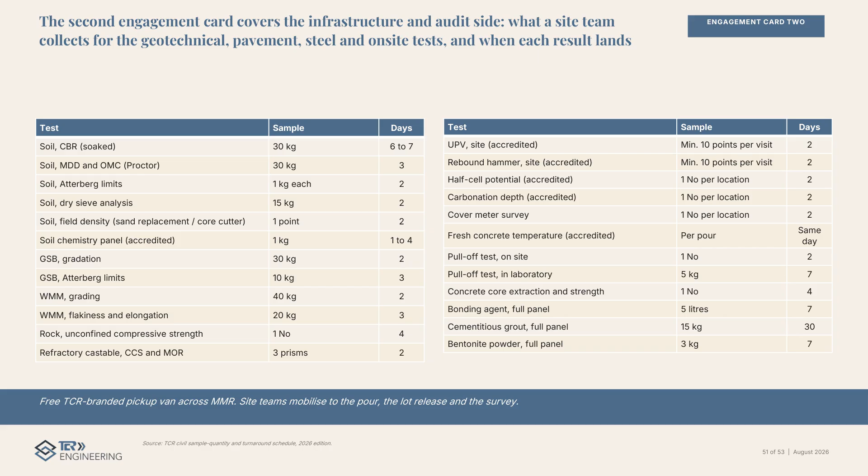Fresh concrete temperatures reported the same day at the pour, and the pickup van collects everything that has to come to Mahape. If you take one page from this brief, take this one.

4 things. 1 laboratory for the whole build, with 1 chain of custody and 1 signature. Accreditation a procurement team can verify independently: 1483 NABL scope items, first BIS-accredited commercial laboratory in India for Rebar Couplers, BMC registered, CIDCO empaneled, high-speed rail approved. Honesty about the boundary, because an unmarked claim is what costs a client an approval, and a marked non-accredited test never has.

And a laboratory that runs on your calendar with a free pickup van across the whole Mumbai metropolitan region. The cost of a component that was never tested is never the cost of the component. It is the rectification, the delay, the arbitration, and on a bad day, the structure. The cost of certainty is a laboratory relationship.